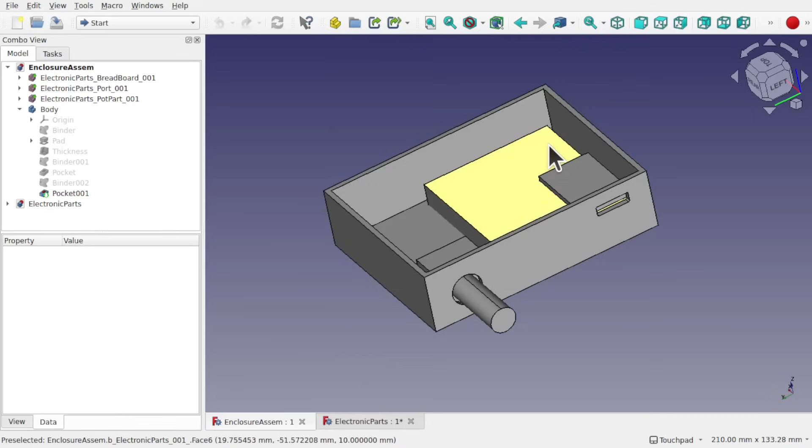Hi everyone and welcome to the channel. Today we're going to be looking at an assembly first approach for creating a box with components within, such as this. When we say assembly first approach, we're looking at creating the electronic components first, as a footprint for any cutouts or hollows in the box to take these components. Once these are created, we can build the box after they've been assembled.

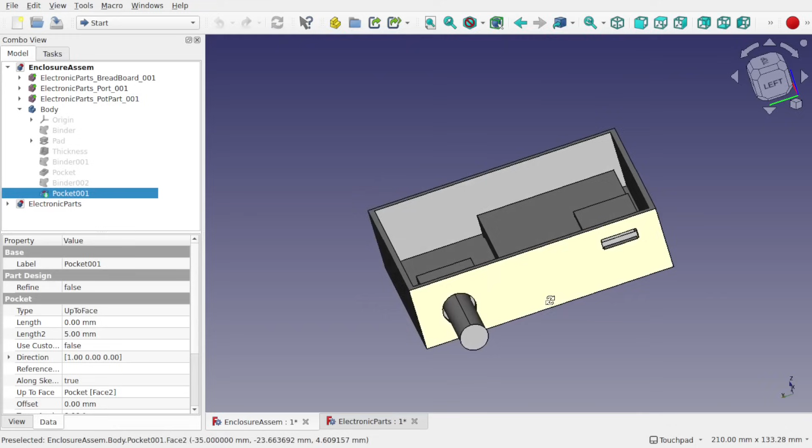So here I have the electronic components assembled in the right configuration, and then a box is created around those. This is just a simple box to get the idea across, and you notice we've got these cutouts here. The good thing about this workflow is I can move the parts under constraint, such as this potentiometer, and hit OK, and the box automatically reconfigures and adjusts around those components.

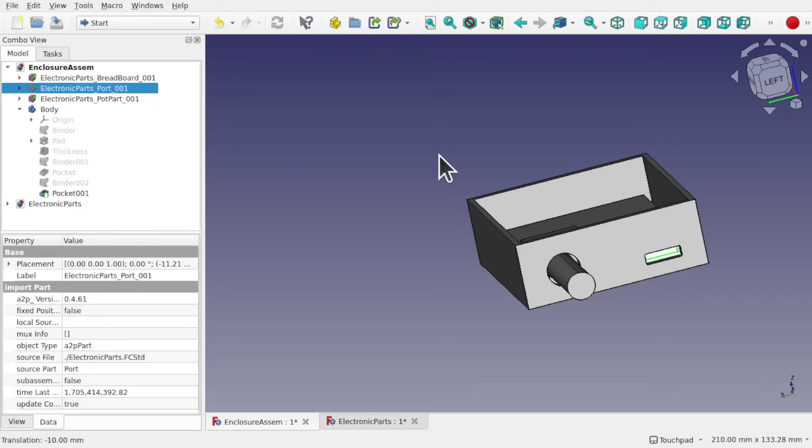So for instance, let's take the port, right click and transform, bring this down and hit OK, and you can see how that readjusts.

We've also included configuration tables. So for this part here, this potentiometer, I've actually built it so these can be adjusted. If I click on potentiometer, I have a drop down here that I can adjust the size of, and the same with the breadboard. This will also have an effect on the assembly when we hit refresh parts in the A2 Plus workbench.

So I hope you're enjoying these videos, and let's have a look how we would follow an assembly first approach.

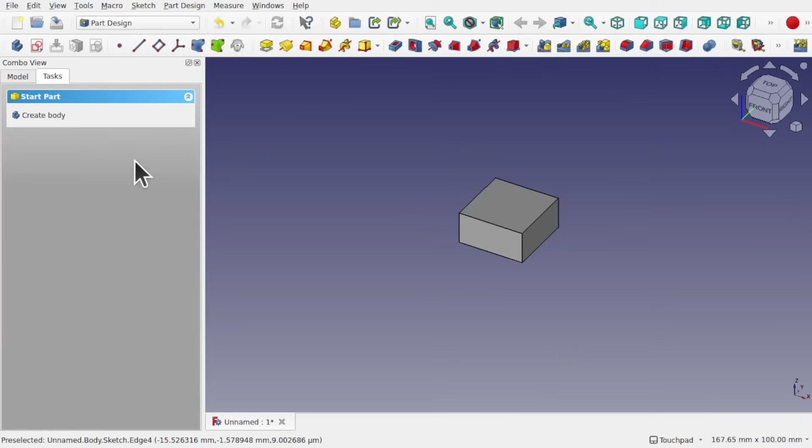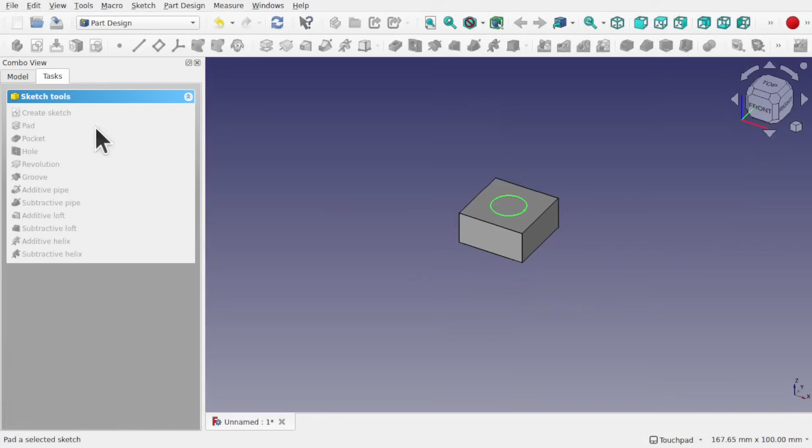These will all be in the spreadsheet in the end. And then we can add something on top of here. Sketch with a circle, something like this, and it's just for the footprint. So I'm going to place another diameter on here of 10 millimeters. Close that, and we'll pad that to 30 mil. So we've got something very simple like this.

So that's one body, and we'll just call that pot part for the potentiometer. And I'm going to come over to the spreadsheet.

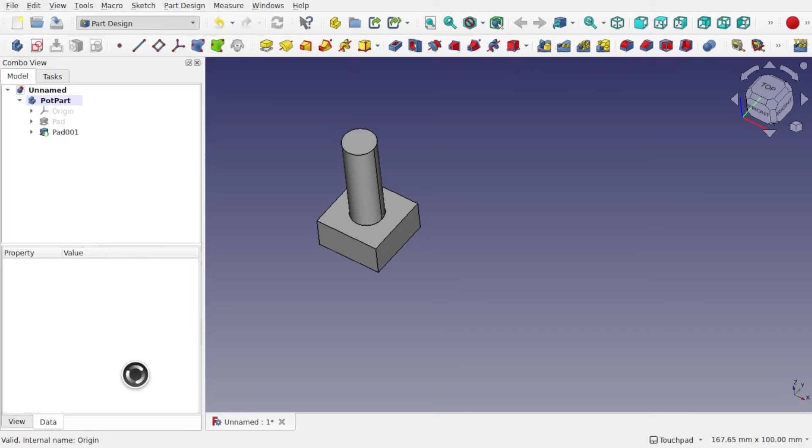So come into the spreadsheet workbench, and we'll set up a spreadsheet for different sizes. So let's come in and create a spreadsheet in here, and we'll add some sizes in here. Across the top, I'm going to put in what it's for, so this is for the potentiometer, just call it pot. And we'll place it in here: type, base size, and the knob diameter. And these have to be strings. So this is going to be a lookup where we can change the size of that potentiometer.

So we leave this one blank, and there's a reason for leaving this blank. There are tutorials about configuration tables on my channel, you'll be able to pick up the process from those.

So I'm going to quickly go through this, and these have to be strings. So we're going to put in here a P1 and a P2 just for now. We can add more in here if we wanted to. Base size, 20mm for this one, and this one's going to be a bit bigger, so let's put 30 for this one. The knob diameter, this one can be 10 and this one can be 15. So what were the diameters on this one? So that was 10, yes. So we're there.

So that allows us to create some proper diameters with the actual part itself. So that's changed that sketch. We've got a sketch in here, and this is the knob diameter. So we come in here and we're going to change this one.

Now the thing is, with my spreadsheet I've got here, let's close that. I want to be able to select each of these, so I'm going to make something called a configuration table.

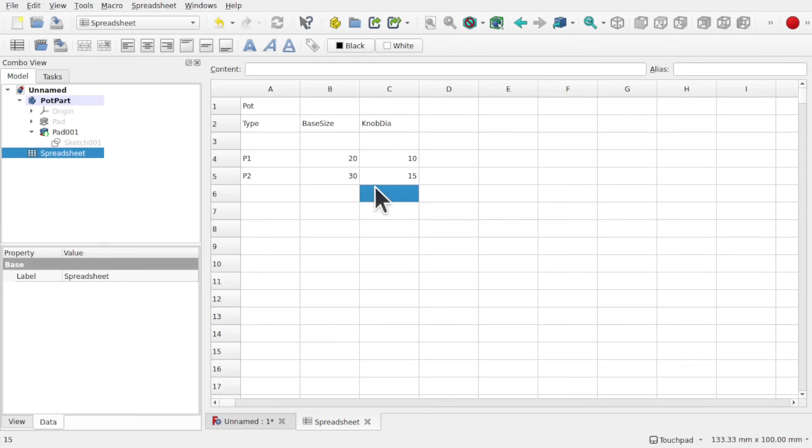What I do is come up and highlight these from this blank row here. If I right click and configure table, I've encapsulated all the data included in the blank row at the top. It allows me to set up the configuration table with a cell range, starting from the blank row, to the last cell of data, which is C5. Let's go for C5, and then I'm going to attach the configuration table to the body.

So we type in body, which is this one here, the pot part. I can even come in here and use the pot part, which allows me to attach it to that one. That makes it more descriptive.

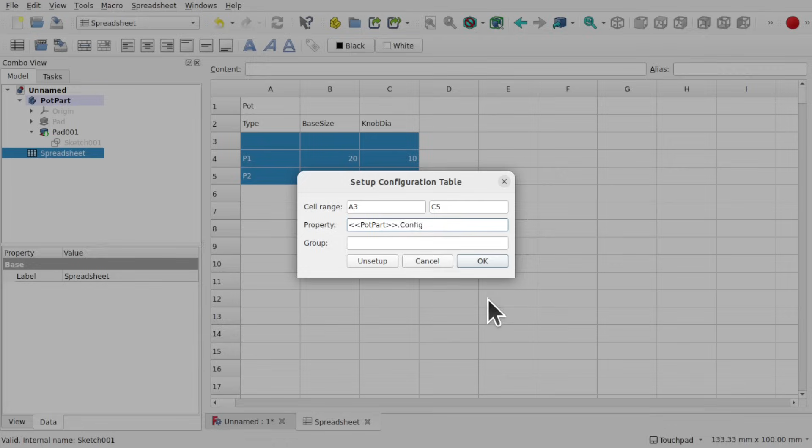And we need to add some kind of identifier in here, so I'm going to go for config. This can be whatever you want. I'm going to call it config, or let's call it pot types.

And OK that. So what we've got now, if I come over to this pot part here, we look down, we've got pot types, and we can change this to whatever one we want. Now, notice the spreadsheet has got this row in here, and it's copied the value of the first one into that. If we look at the pot part, we've got the pot types, and if I change this to pot type 2, look at the spreadsheet, this has changed.

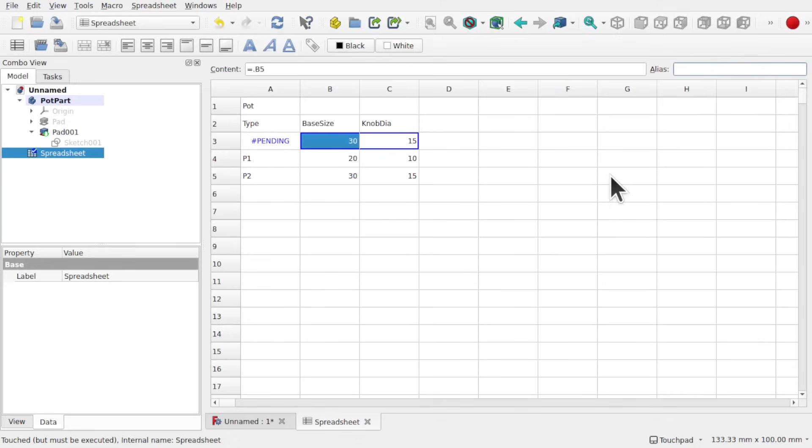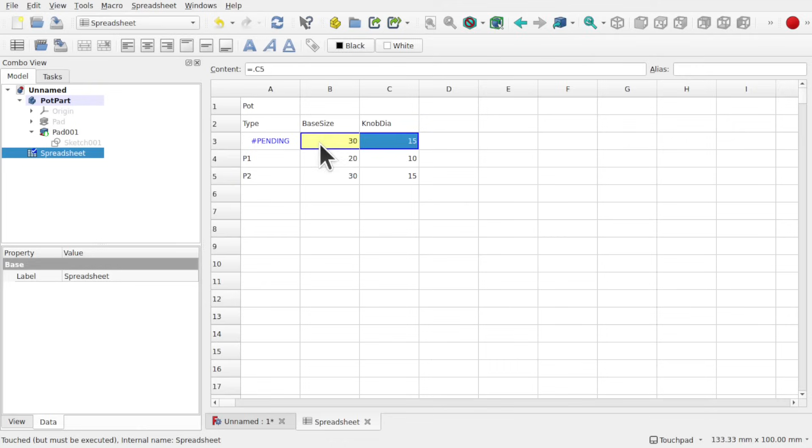So now I can alias up this row, and we've got base size. I'm just going to use the same column names here. So we've got base size, and this one, you can see it's highlighted in yellow. That's going to be the knob diameter, KnobDia. So we've got those there.

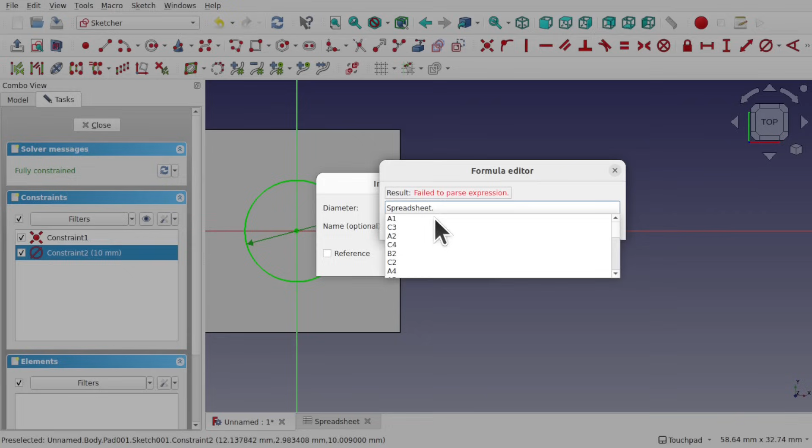Now let's go back to the sketch. Let's close that. So I'm in that pad in this sketch, and we'll alias up this diameter here. We'll come into this, the formulas, and what we'll do is hit delete and type in spreadsheet. And we want the alias, which was knob diameter. There we go, and OK that. You can see we've got 15 grayed out in there. Hit OK. This has changed to orange, which means it's referenced outside of the sketch, and we can close that.

So we've got that one in there. Let's do this one now, which is the pad. It's actually at the top. We want the base, this sketch here. Let's double click that and set up the base.

Double click, and we want this one, spreadsheet, and type in base size. So we've got spreadsheet.base size, and OK that. OK that again, and close.

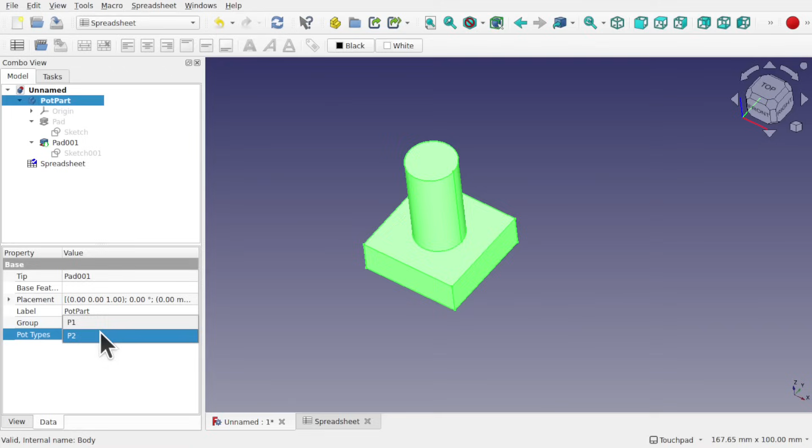So now we've got all those sketches linked to that spreadsheet, which is controlled by the pot part, the body. So this drop down here, when I change this now, our configuration table kicks in, and we can change the sizes of this.

Let's make another component. So back to the part design, we're going to create a new body, and we're going to create a new sketch along the XY plane. Let's come over to the model and just hide the original pot part, this one here, press the space bar, and we'll create a breadboard.

Remember, this is just a footprint, so I'm going to create a rectangle and use these two edges and this center point. Symmetrical constraint, you can use a center to a rectangle if you want, this one here, and set the sizes.

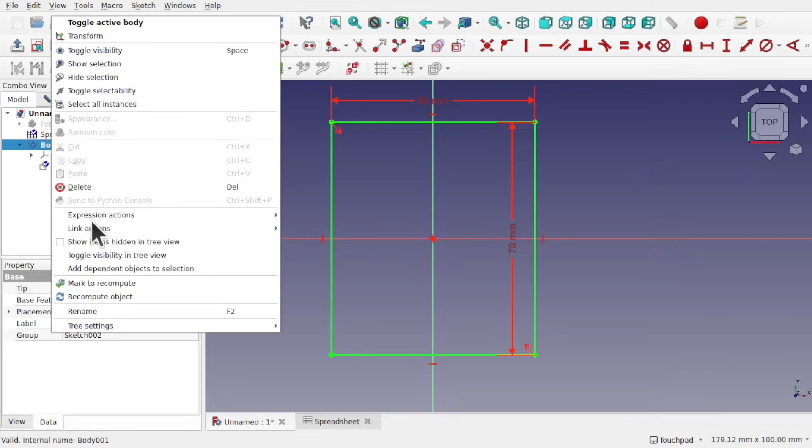And again, we're going to control this, get some sizes in for the time being, control this via spreadsheet. 60 by 70 for the breadboard. Just rename the body, right click, rename, and type in breadboard.

Let's go to the spreadsheet and create another configuration table in here. So this one's going to be, say at this point, if I'm going to add more in here, it might be best to come over to here and type in breadboard and place them in here. So you can have more than one configuration table in a spreadsheet.

Again, type, and let's place height, width, and length. Again, leave this row clear and type in here, I'm going to go for a B1 and a B2. You can call these what you want. So the height here will be the actual thickness of the breadboard. Maybe I should type thickness.

So this one will be, let's go for something like 10 with a width of 60 and a length of 50. And we'll just make a smaller one in here of 30 and 25. Do we have the same thickness? Let's go for slightly smaller, so something like 8 mil on the thickness.

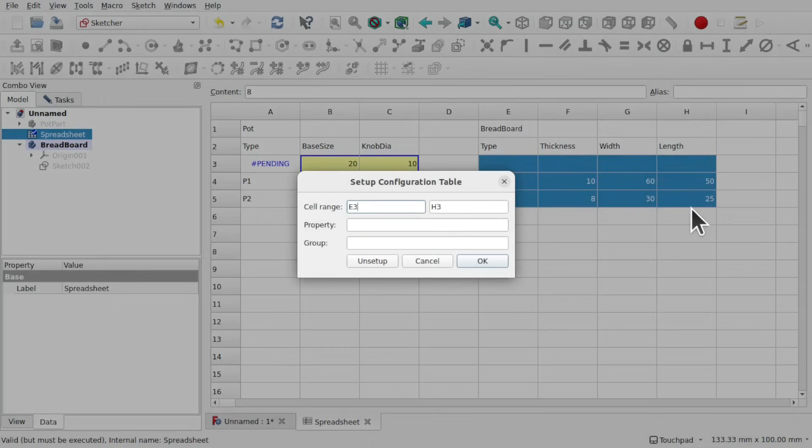So we've got this one set up. Again, highlight these rows, right click, and configuration table. So we've got E3 to H5. Let's place H5 in there. And the property, I'm going to place it on the body. Use the name, so we need the breadboard there, so we get the right body.

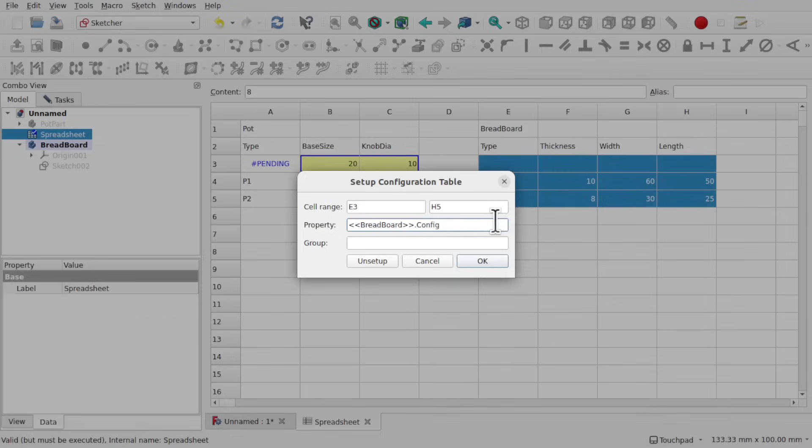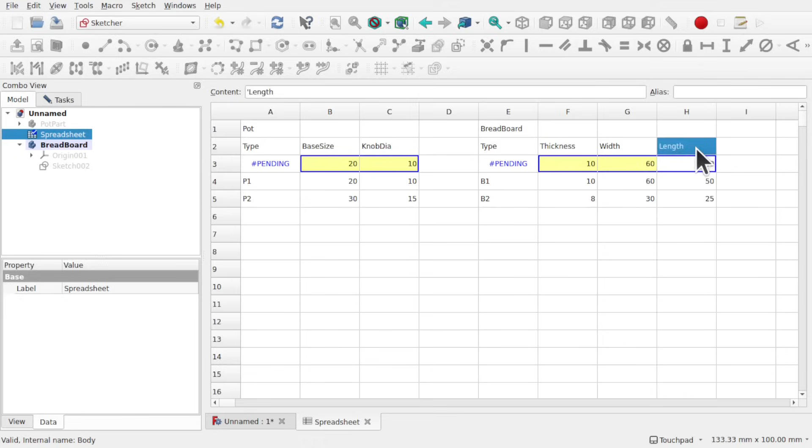And we'll change this one to config as well. You can call this whatever you want. And then hit OK. So we've got the config on the breadboard, and this is the config on the pot part. Let's set this up. This one is going to be BB thickness. And this one's going to be BB width. And this one's going to be BB length. So we've got our sketch in here.

And we'll set this length spreadsheet dot BB, and we'll put this as the width. Okay, that, and okay. And this one, double click that and set that as BB. Well, it's actually going to be spreadsheet dot BB length, and okay. So we've got those two in there.

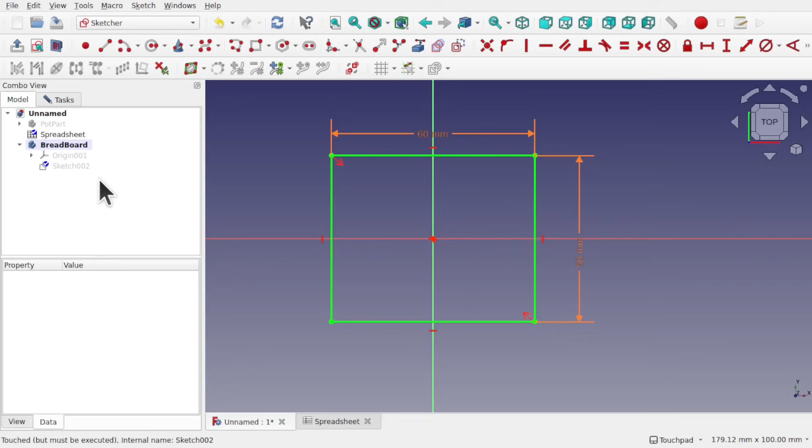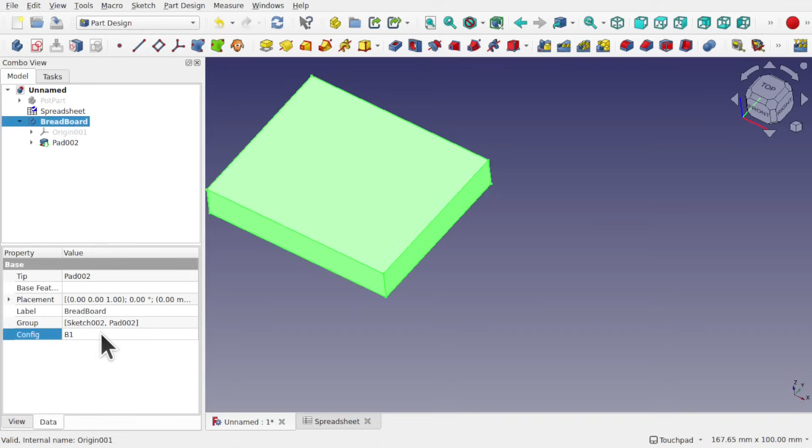This creates our breadboard, just the footprint of the breadboard. Let's go over the tasks and hit close. We'll take that sketch, we'll pad this, and we'll set the parameter in here to spreadsheet dot BB thickness, and okay that. So now what we've got on the breadboard, we should have a config which we can change, which will change the size of the breadboard. So now we've got our part set up.

So we've got a breadboard and a potentiometer. Let's save this and call it electronic parts. And we'll quickly do one more. And we'll create a body, create a sketch, XY plane, okay. And this is going to be a part that doesn't change size.

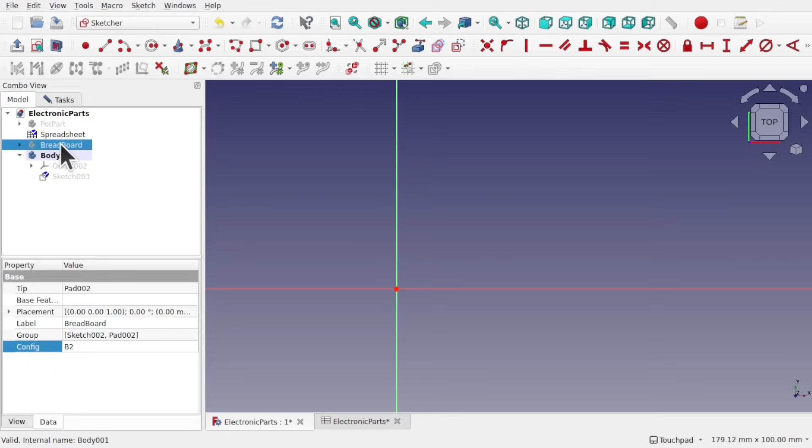So we've got our body here. Let's get hold of the breadboard, press the space bar to hide it. And something very simple like a port or something like that. We'll do that. We'll put some length in here of 30. This height of 20. We've got that there. Close that. Take that sketch.

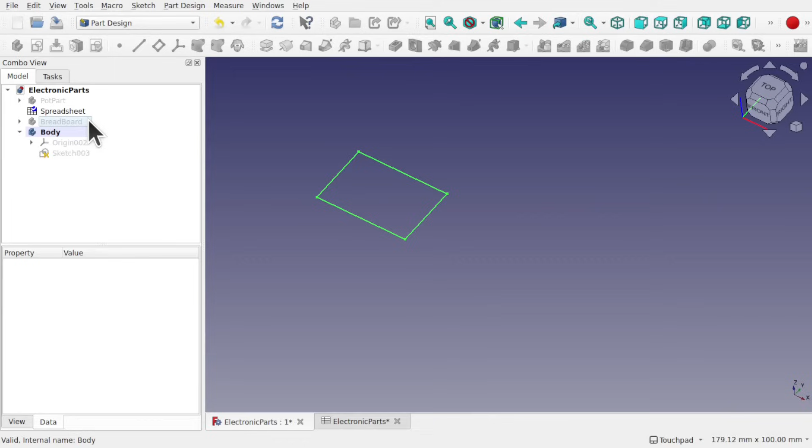And it's going to be some kind of board. So I'm going to pad it by 2 millimeters. And then on top, we'll add a sketch. So I've selected that face. Add a sketch.

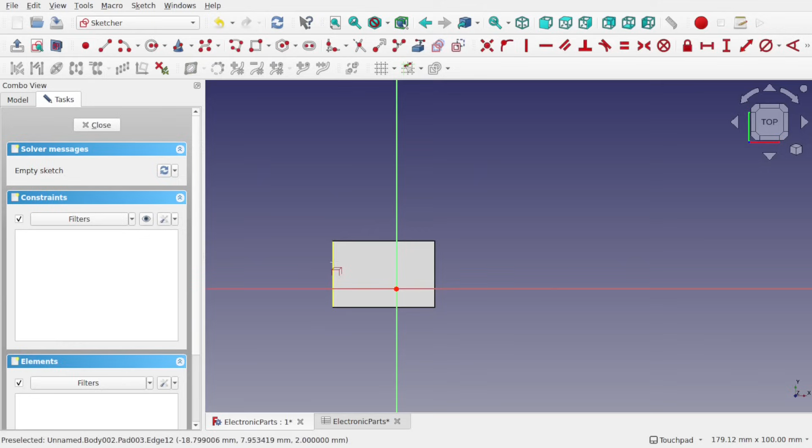And we'll place something in here. So let's bring in this line, which we're going to attach it to. Let's zoom in a bit so we can see what we're doing. And I'm going to place just something quickly on here, like so. And this will have a height of 12 millimeters.

And we'll place it some distance away from here. So I'm just doing this one very quickly of 4 mil. And we can set some length in here as well of 4 mil as well. So we've got something very simple. I'm just going to pad that. So select that sketch and pad that by 3 millimeters. And what we've got is basically something like a port.

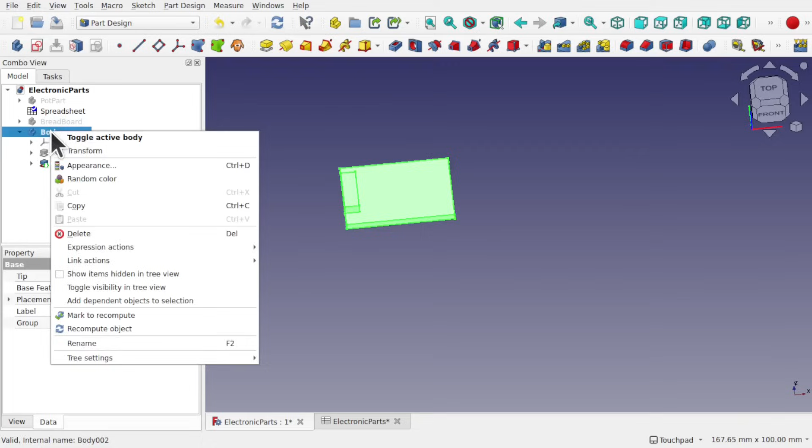So this is going to be a port that we can push a connector into. I'm going to right click and rename that to port. So it's a port on a board.

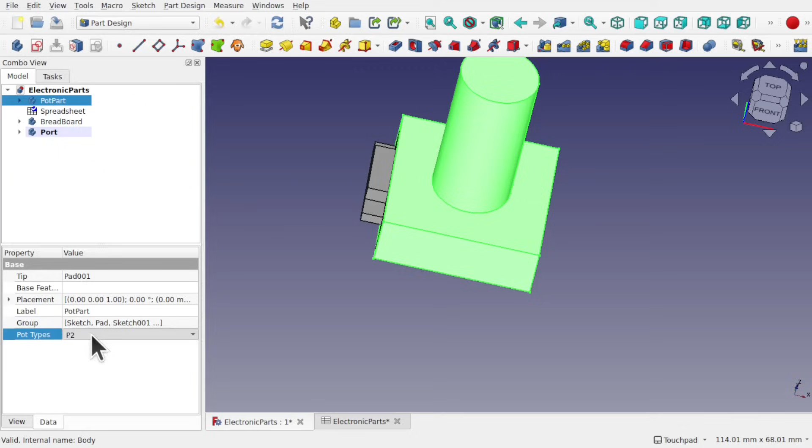So we've got our footprints of our electronic components, and now we can go about assembling them. So we have all our parts in one file, our electronic parts. We've got the port, the breadboard, and the potentiometer, and we can change them via the drop downs that we've added onto the bodies, or set our port. We're going to create an assembly for these now to place them into a position and then create a box around them. So we're using an assembly first approach.

And to do that, we're going to be using the A2 Plus workbench, this one here. If you haven't got the A2 Plus workbench, just come up to Tools and Add-on Manager, and you'll find it within here. We can check for updates and see if that actually needs updating. I've checked for updates and I've got an update available, so I can click on that and click the update button, which is close, and I'm going to restart now.

So I'm back in FreeCAD and I can come over to the A2 Plus workbench, and I'm going to create an assembly in here. For that, I'm going to create a new file and then straight away save it. So File, Save, and I could call it Enclosure Assembly.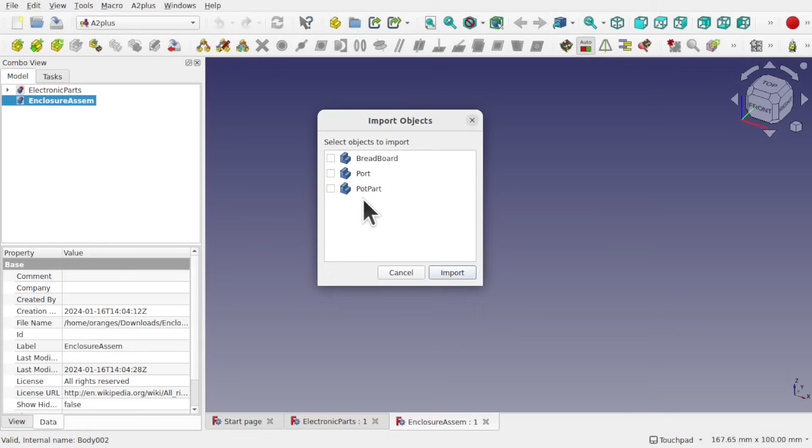We've already got the electronic parts open here, but what I'm going to do is import those parts into the assembly first. So I'm going to use this button here, Add Shapes from External File, and click that. We'll find our electronic parts, and we have each of the shapes here - the breadboard, the port, and the potentiometer. The first one we import is going to be the fixed part, but we can change that. So I'm just going to check all of them and hit import.

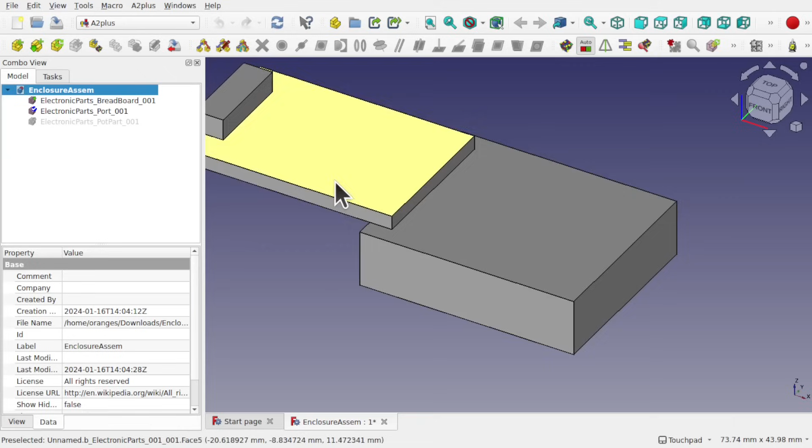So they've come in. The first one that's been laid down is the fixed part. And if I move my mouse, all I need to do is click and we get the next one. And those are all in our assembly. So I've got all the components in our assembly.

I'm just going to come up to View and toggle Axis Cross so I get an idea of where my axis is to make this a lot easier. So with assemblies in the A2plus, because it has a solver, it needs a fixed part because the solver will solve the assembly through a chain to the last part, which is fixed. So we always need a fixed part.

Now, because this one was imported first, we look down, we see this fixed position as true. We can change that. We don't need to have this as a fixed position. We could have the port or the potentiometer as a fixed position, but I'm going to go for the breadboard because it's logically the one that will be the fixed position.

And I can move this with a right click and transform. Fixed position parts are moved with the basic right click and transform. The idea here is to get a layout of how the components are going to sit in an imaginary box.

So for instance, I want this component here. I've got this port here. Because this is a fixed position now, I can start constraining to this. So if I think of my box is going to come around here and encapsulate all these items, then I would say that this face here would probably be in line with this breadboard.

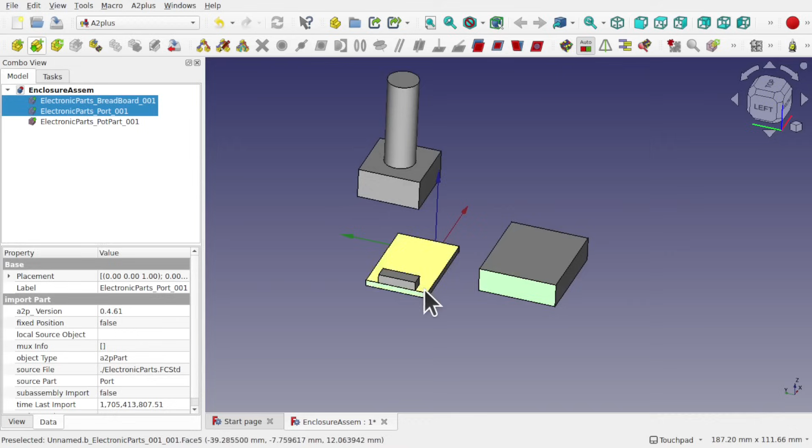So these two faces will be on the same plane if they're pointing in this direction. We make those planes coincident. If we have a plane here and a plane here, these will pull them into a planes coincident. Remember that the plane is not just the face, it's the plane that this face sits on. So if we place an infinite rectangle here, it will be in line with this face.

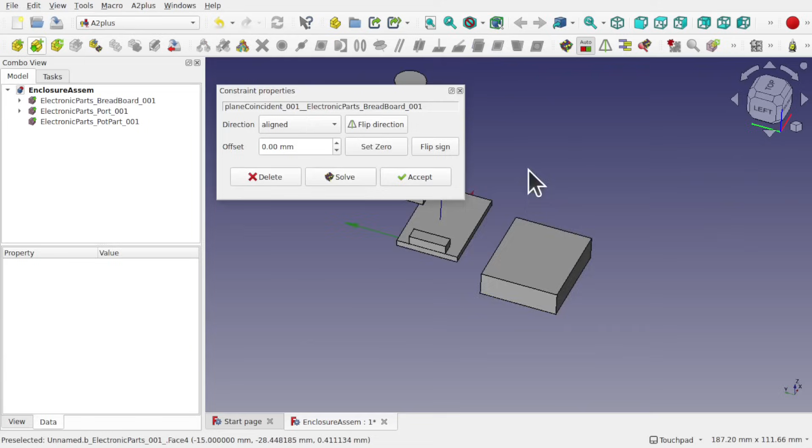So control click both those faces, they're highlighted, come up and use the plane coincident. And what you'll see is they'll be pulled coincident to each other. Remember the infinite plane that they sit on, and you'll see they are actually in line on that same plane, and we'll just accept the constraint.

So now I can actually move this with this tool here. There's a tool, move the selected part under constraint. So we click that and then click the selected part, this part here that we want to select. If we move it, I can't move it forwards, move it left and right, but I can't move it backwards either. And also I can move it up and down.

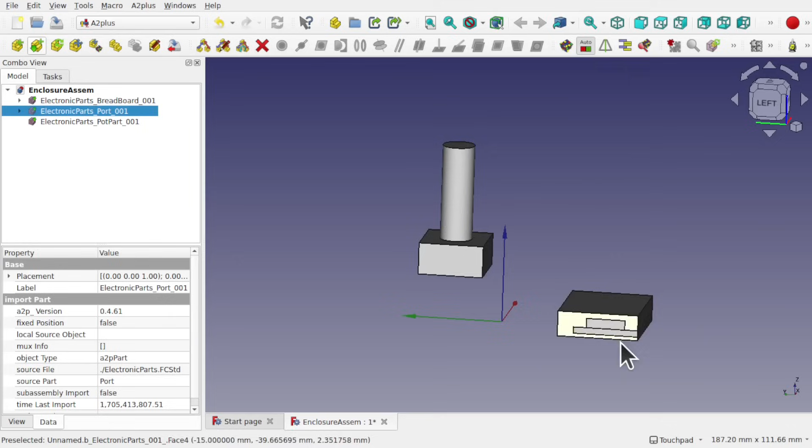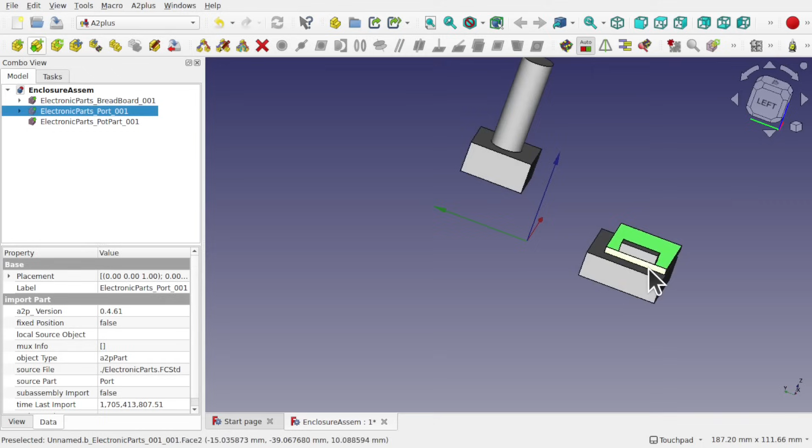But we stop and keep that plane, that face sits on, coincident with the plane of the breadboard, that face there. So I'm going to place this. Now I'm thinking that if we have this port with some legs on here, then maybe we want to place it on the breadboard, so we want to place it here. So straight away we might see that, well, actually we might need a bigger breadboard, and we can adjust that.

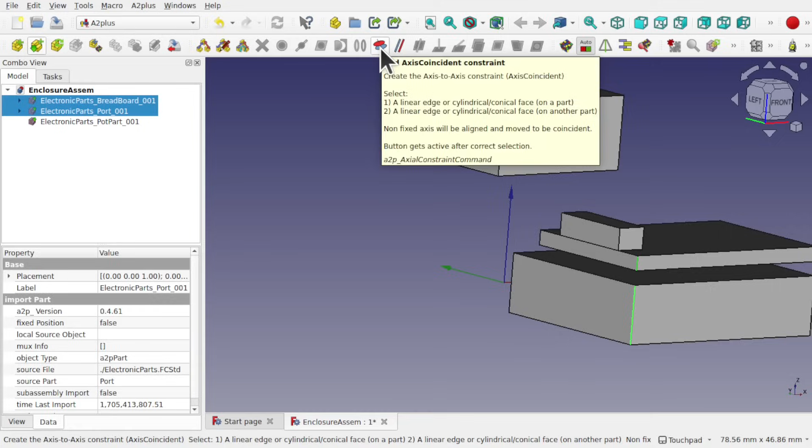So that's there. I'm going to perhaps take this edge and control click this edge and use an axis coincident constraint. So those edges, if I click that, that'll bring those edges together - the axis of those edges - and they'll be coincident, and we'll set that.

So now if I try to move this, what will happen is that we move it under constraint. So I can't move it backwards, I can't move it left, I can't move it right.

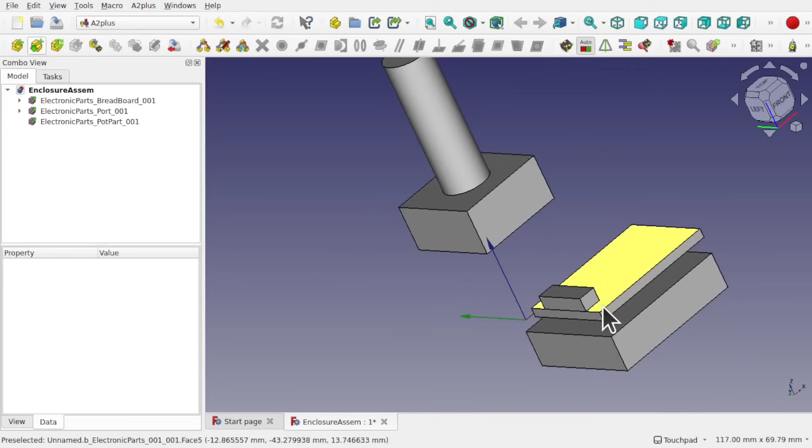The only way I can move it now is up and down, because it keeps the axis of this edge together along with the faces, so they're both coincident to each other. One thing to note is we don't need both of these constraints. The first constraint added allows us to move along that plane, but by adding the axis constraint on the edge, it actually makes the plane's coincident constraint obsolete.

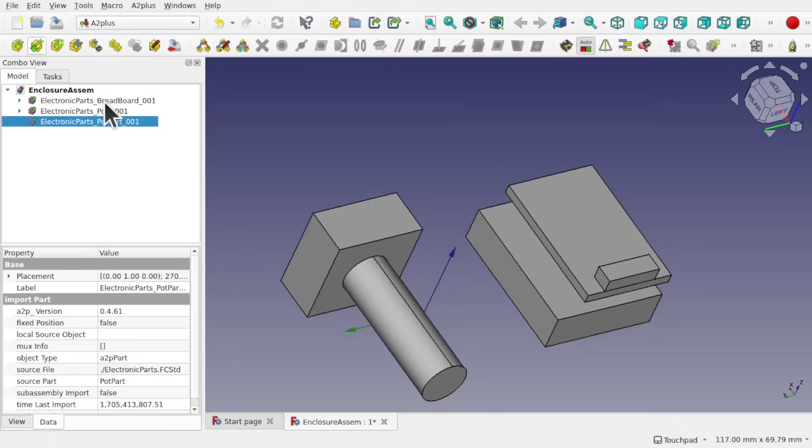Once I'm happy with where this is going to sit, I can move on to this one. It may be handy to come into the part, right click, and use transform to get it into the right position. For instance, let's bring it around this way, and then hit OK, so it's in a position where we can easily make our additional constraints against it.

Again, I'm going to use this plane of this face and this plane of this face and make them coincident to each other, and accept that. Maybe I want this bottom edge as well, so take that and this edge here, and make those axis coincident, and accept that. So these are on the same line here.

Then it's a case of using move selected part under constraint, selecting that part and moving it across to wherever we want. So I want to move it, say, about here. So this could be my layout totally finished.

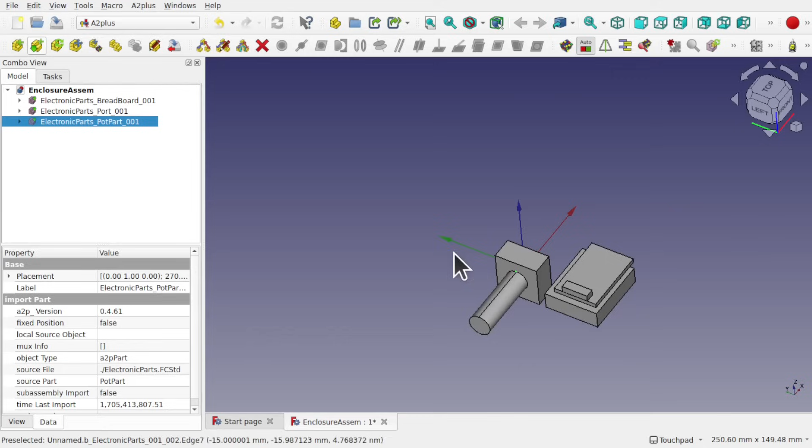And this is where I'm going to create the enclosure around. Let's save that — File, Save, or Control S. Now at any time these can change size.

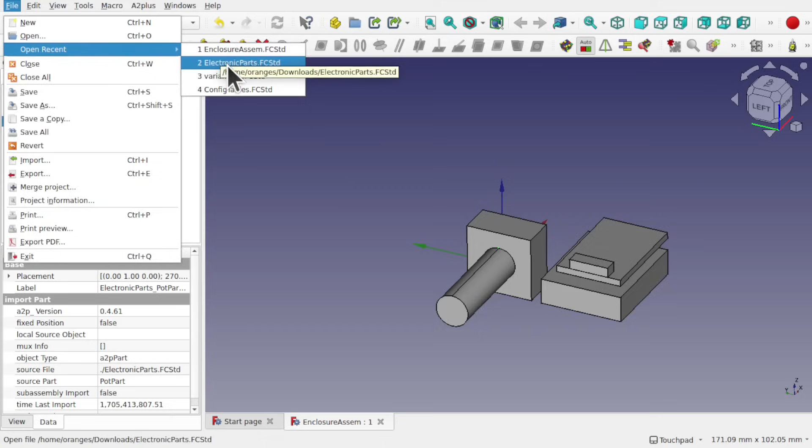Remember we had, if I go back to the electronic parts, these can be changed — the sizing of them. So that's changed this breadboard. If we look at the breadboard, we're on breadboard 2 at the moment, so let's drop this down and use breadboard 1, which is a much larger breadboard.

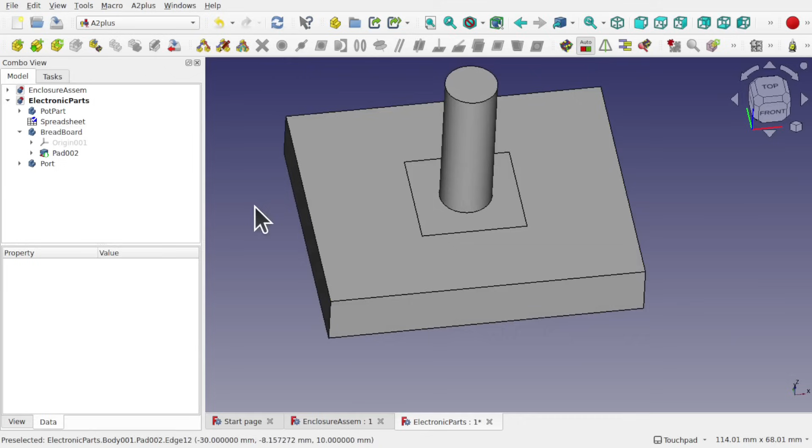We have to save this, so Control S to save, and let's go back to our assembly and refresh, update parts imported into the assembly. Hit that, and the breadboard updates — you can see the breadboard is updated in size, and we just need to make some finer amendments, finer adjustments with, say, this potentiometer.

Now we've got everything in place, we can start building the enclosure. It's important to build the enclosure within the assembly itself, so we get an idea of where all these parts sit, and we can create subshape binders against these parts, against the enclosure, to take out things like cutouts or hollows for our parts to sit in.

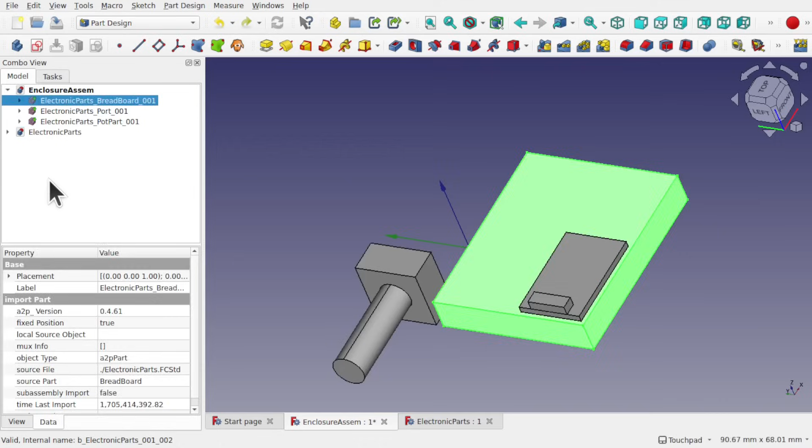I'm going to be using the part design workbench for this. Remember, we're using the same assembly file, so that's come over to the part design. Now we must make sure nothing is selected in here, otherwise it's going to pull it in as a base feature, and it will take its original position. We don't want that — let's Control Z that.

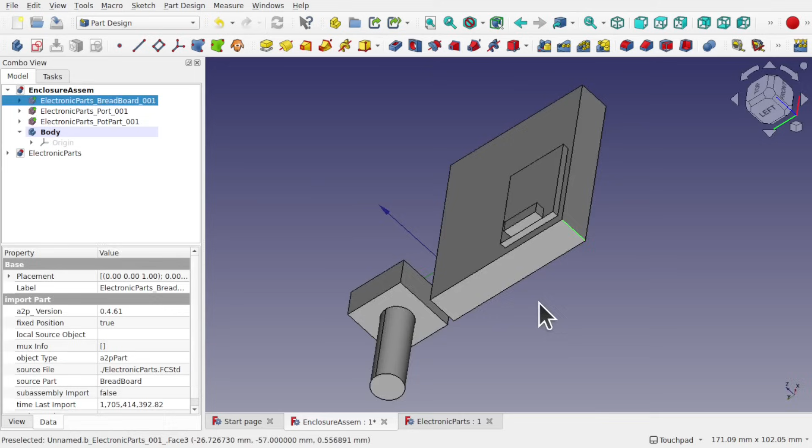So we make sure nothing's selected in the model view and create a body. The body has been added. Next I'm going to Control-select a number of edges from the imported components, which will define the boundaries of our box that we can use a subshape binder against and make sketches against.

And we'll take these two as well, Control-select these. So I've got those in there, and we'll click on the subshape binder — this will pull those edges in. So now if I hide all of these parts here, what you'll see is four orange lines.

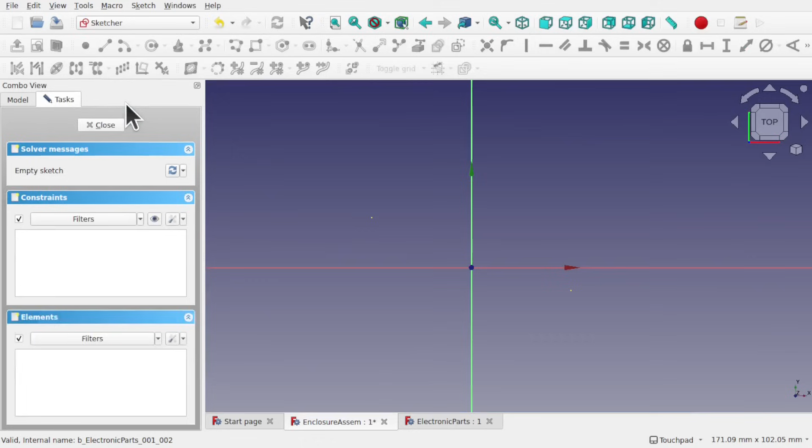So now I can come into the body — got the body there — and create a sketch along the XY plane, and hit OK. We can see those four lines there, so you can see them in the sketch. I'm going to use the external geometry tool and import these lines into my sketch.

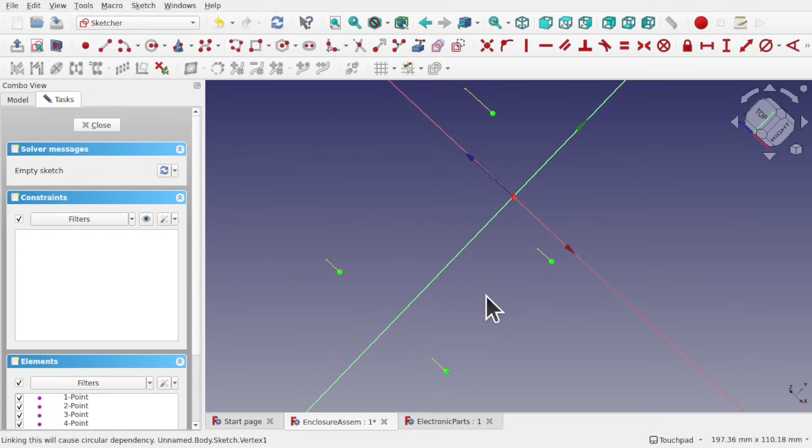Remember, the sketch is 2D, so we're going to get the vertices going along here. Let's click on top and have a look, see what we've got — so we've got the vertices that have been pulled in as a reference to that box. So now we can create the box.

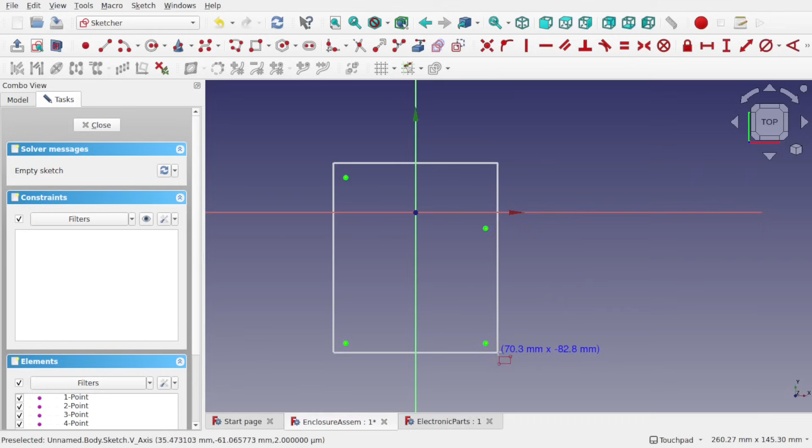Now I'm going for a standard box across here, and I'm going to come out this way because I want some clearance for this box. So something like that — let's hit escape. So this point and this point.

And we're going to use the lock constraint, so I'm going to quickly lock those into position. This one will be a minus value, but that's fine. We're going to give around 5 millimeters of clearance.

And the same with this one, 5 millimeters. We can use the horizontal and vertical constraints if you want, it's up to you, but lock is quite useful to actually get this geometry down quite quickly. And a lock constraint on this side — again, it's going to be 5 millimeters.

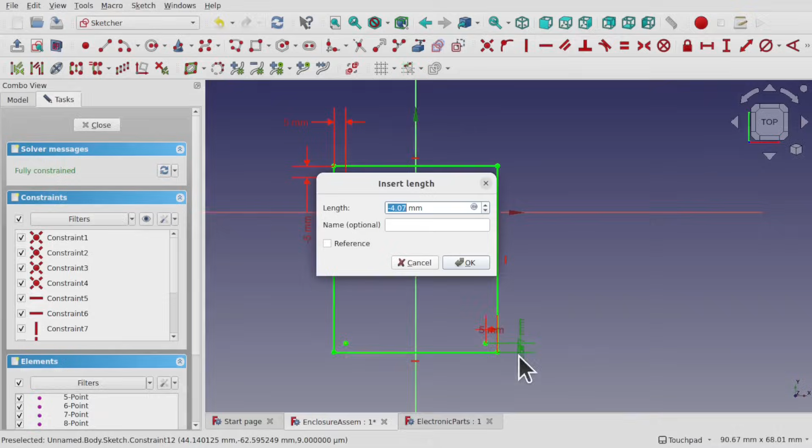Clearances, remember this one's -5. Clearances and sizes, etc. can be controlled via a spreadsheet if you want to, and we can place that in a usual single spreadsheet for all the items that we're going to place here. So we've added all those constraints, and let's close that now.

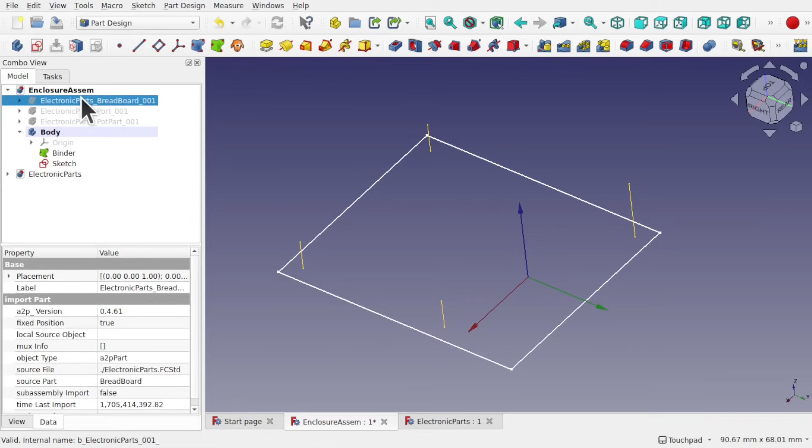So we've got the outline of the box that we want. Let's bring back the elements. I'm going to click on one and press the space bar, then click on the others and bring those back in. So we've got those in there.

If I wanted clearance with the sketch, I can take the sketch of that body, come down to the attachment—because it's attached, see, the attachment offset—the position, and change the position along the Z axis. We can give this a clearance of, say, 1 millimeter or so from there. So we've got that part in there now.

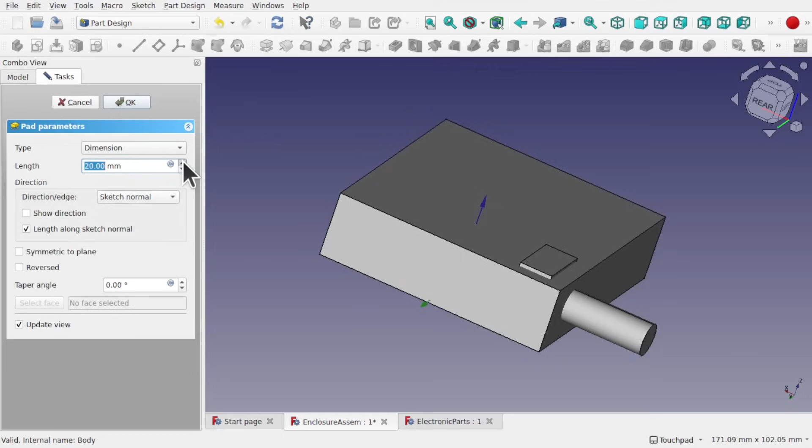Now comes the fun part. Let's take that sketch and just create a simple pad, and bring the pad all the way up so it encloses all the items within, like so.

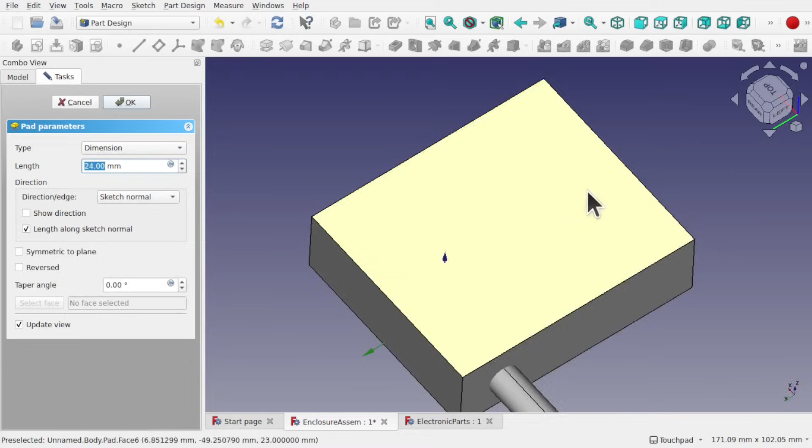It's totally up to you how you make that enclosure. We may want a half enclosure, for instance, something like this, so it's halfway. But I'm going to go for a full enclosure and then remove the walls in here so I can see inside. That's okay.

I'm going to take the enclosure and now use a thickness to remove those walls. And I quite like this beveling on the outside, so I'm going to keep that.

We don't have to. We can come over to the left and select different join types like intersection, but I'm going to go for arc, and we'll increase that slightly to something like that.

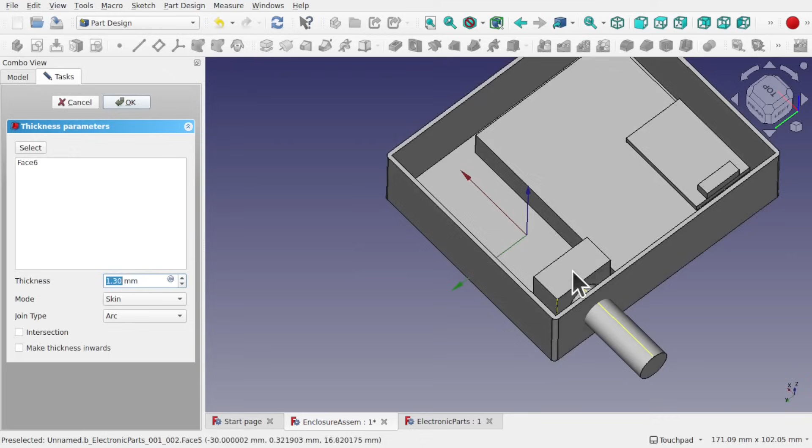Remember, we can make this go inwards by using the make thickness inwards if we wanted to, and go this way. It's totally up to you. Let's actually do the inwards thickness. So we've got that there.

So we've got a 1.3mm. Let's change this to 2, and we'll OK that. We'll say we're just creating this box here.

We can actually put a top on here if we wanted to, but we're interested in creating the cutouts of this now. So for the cutouts, we use subshape binders.

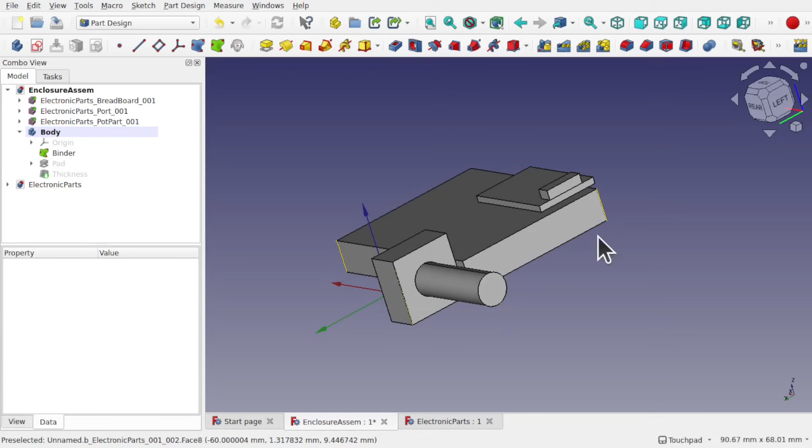So let's click on the box and hide it and think about the subshape binders. We have the face here and a face here that we need to use as subshape binders. So we click on this one here, and what will happen if I create a subshape binder for that one—we've now created the area that we need to cut out for this component here.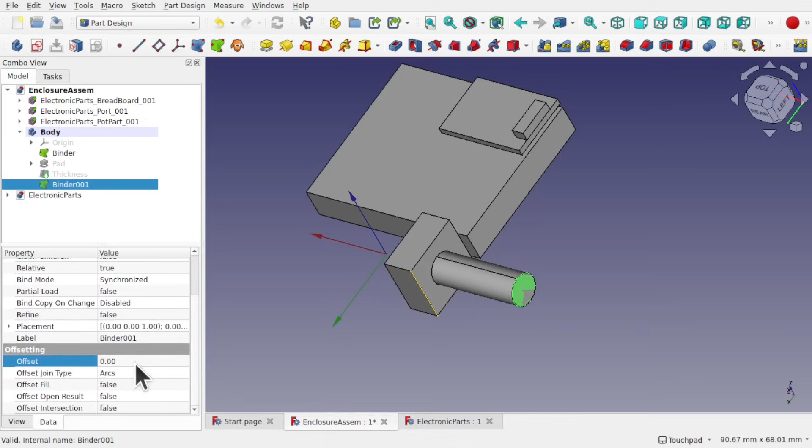But we need some clearance, because if we cut this out, this is going to be tight on this component and it won't turn. If we look to the left, we have this binder, and if we come down to the offset down here, we can use an offset to increase this offset by, say, 2, and click off. You see we have the offset there that we can cut out from the shape.

Let's click on the binder and just reduce that down a bit. We've got 2 here; let's reduce this down to 1. So we've got some clearance now. We can go 0.5, etc.

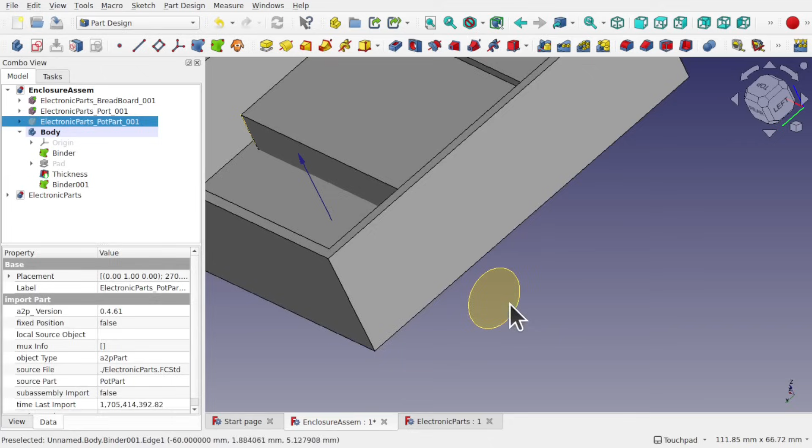Now what I want to do is pocket this through the thickness. So our last operation, this one here. To do that, let's just hide the component by clicking on it and pressing the spacebar, and select the binder. We use the pocket.

And what we'll see is that because we've got the length, it's pocketing, but it's not going far enough. If we chose through all, it will go through the wall and outside the other, which is not what we want. And if we go up to face, what we can do is pick the face this will travel up to.

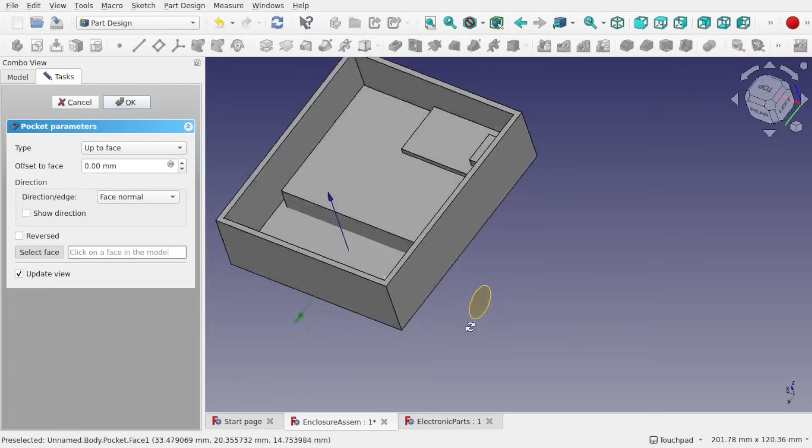So I'm going to come round inside and select the inside face, and we've pocketed through one face and up to the back face—so right through that material there. Let's hit OK.

Let's turn our attention to the next component. I'm going to click on the box and press the space bar to hide it. Come in, select the face I want to pocket, this one here, and use the subshape binder.

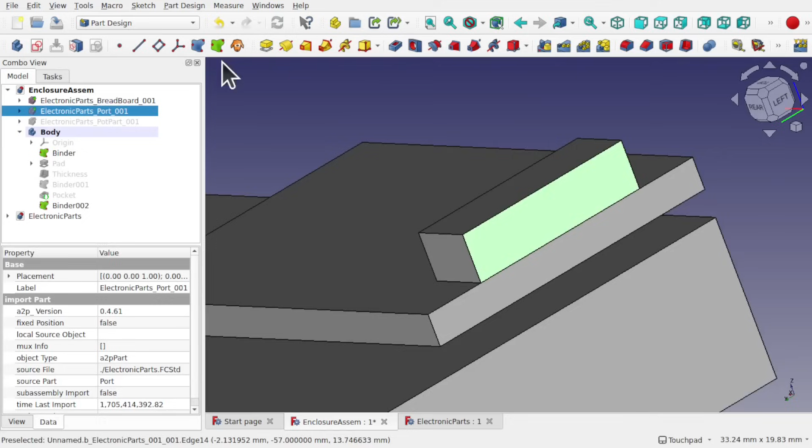Because we've got an active body, it'll pull that face within. Again, we can click on the binder, come down to the offset, and give it an offset, say of 1mm. Let's have a look what that's going to look like. Might be a bit too much. Let's go for 0.5.

We've got arcs set for the offset type. We can use that as intersection or tangent if we wanted to. Let's go for arcs to make it look nicer.

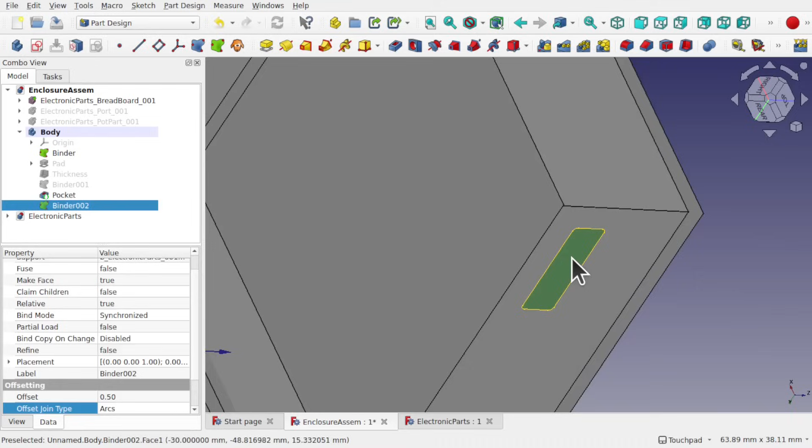Now we've got that subshape binder. Let's hide this component and bring back the pocket. So our last action, the tip, press the spacebar. Click on the subshape binder and use a pocket. Now you see that it looks like this has disappeared, but what's happened is that the model has shifted to the left. We need to use this item here, the fit all, to bring it back into view.

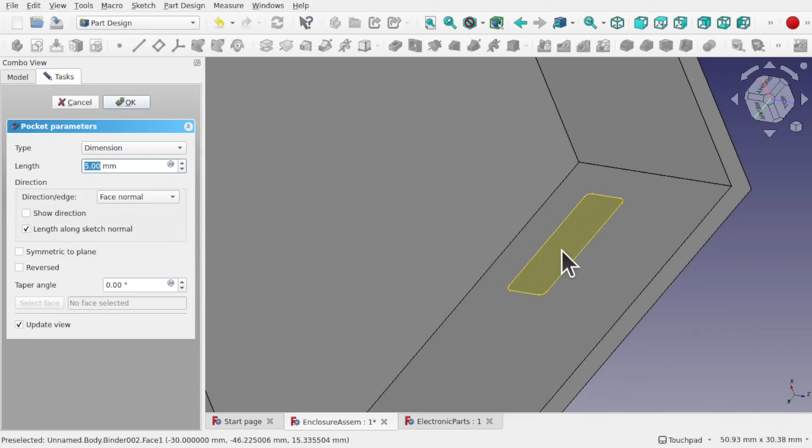Let's zoom in. We've already got the subshape binder selected and the operation is being applied, but we need to click reversed, so it goes in the reverse direction. From here, we can select up to face. Let's see if this is going to work, and click on this face, and it will go through and out the other side. Or we could just use the dimension as you saw before, and that would actually work with that one there. If I click OK, what we have now is the box with the cutouts.

So I'll bring back the parts. You can see that we've got the knob of the variable resistor, the potentiometer in there, and we've got a cutout for the port.

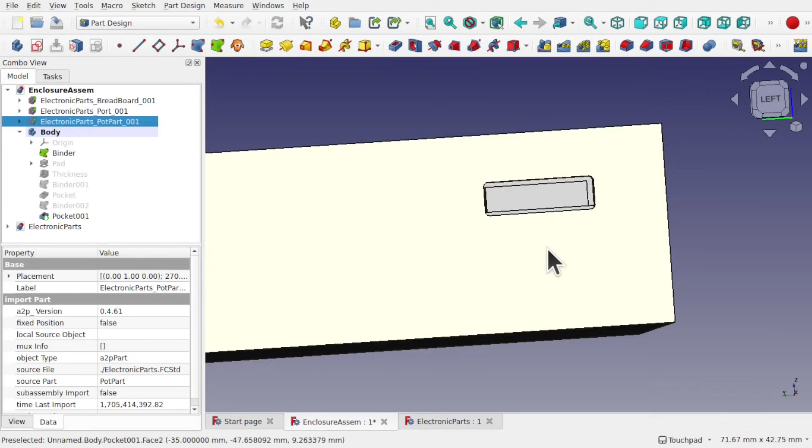These subshape binders are relative to the object that they've bound. You can see that on the binder. If we go down to the binder here, you can see that we have the relative setting, if I can find it, is set to true.

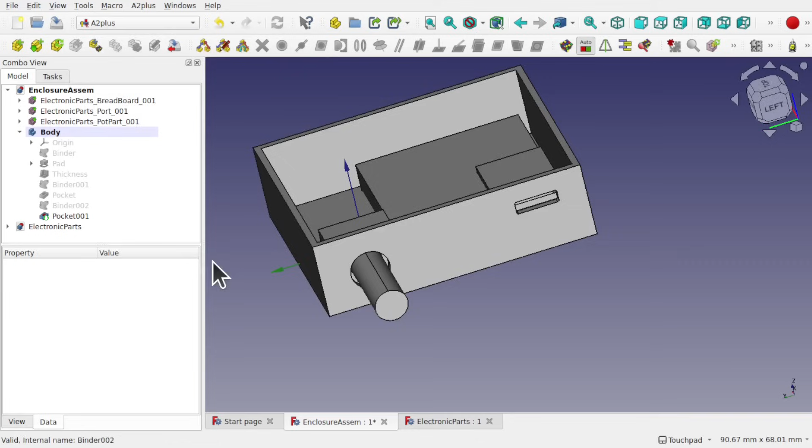Which means if we go back to our assembly, the A2 Plus assembly, and let's hide the binder and any binders that we see in there, we've still got the pocket there, and we use the move the selected part under constraint and select, say, this one here and move it over and drop it there. You can see it hasn't updated as of yet.

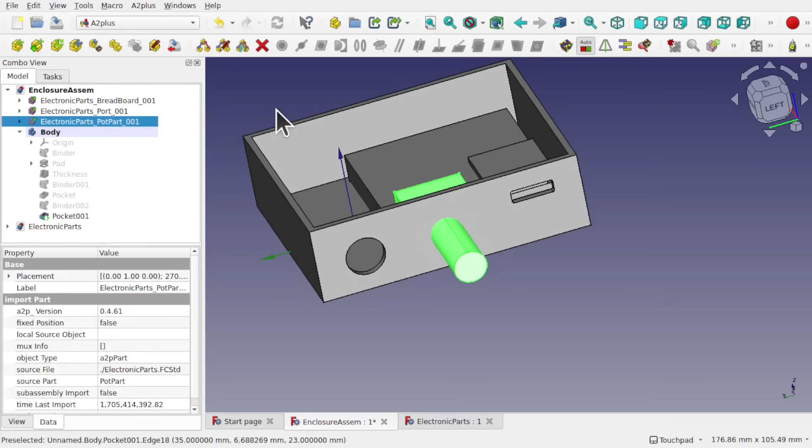So we need to force an update. If I go out to edit and refresh, you can see it's not available. So FreeCAD hasn't seen that it's been updated. We can force a simple update by right-clicking and using transform, just moving it slightly and hitting OK. That will force an update for the box to actually update, and everything is back in position.

The same with just right-click and transform. If I put this right out here and hit OK, it forces everything to update. So this means that I can place these parts into positions that I want. Let's bring this up a bit. And the subshape binder underneath will follow, as long as I force an update.

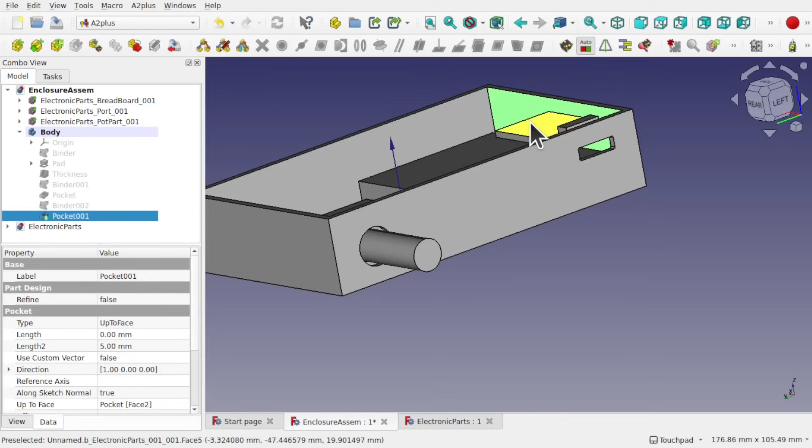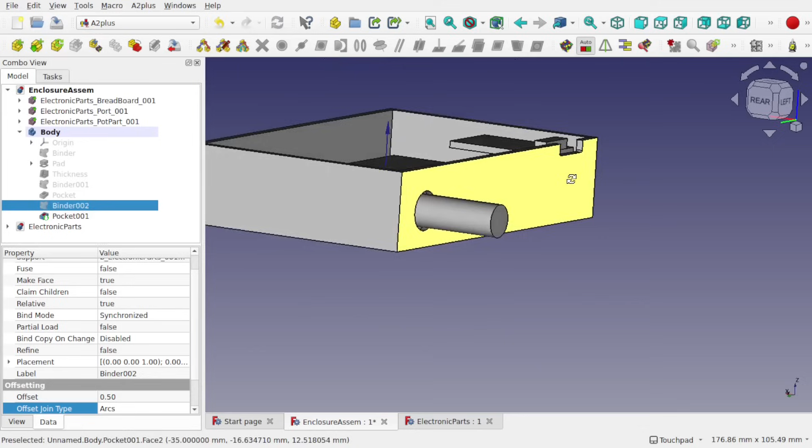Now, if I didn't use right-click transform, I could come into the binder. So this binder here is binder 2. Right-click on the binder and use synchronize. You see a tick has been placed upon the binder, and using the shortcut key for refresh, or just edit refresh, that will move it. You can see that's moved as we've moved the component.

We can move that under constraint and just use the transform, right click, transform, give it a small nudge and hit OK. And it's moved there.

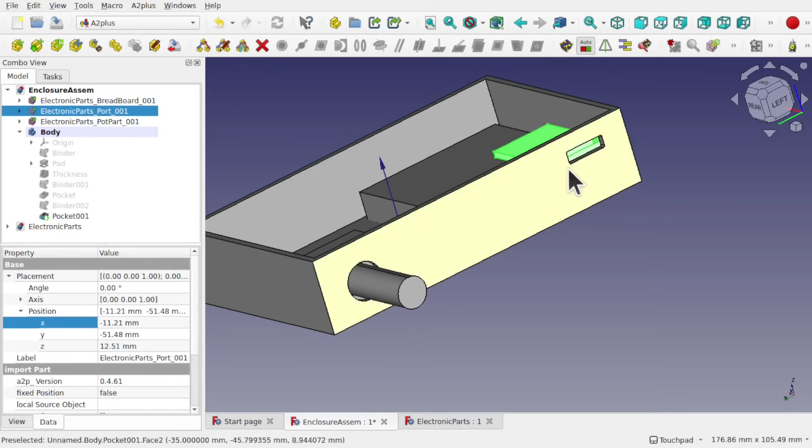Or we could transform this, move it under constraint, and then come over to the part, this one here, look at the placement and change the position slightly. And that will update. So we've got full control over our model just by moving these parts.

For our enclosure to update. So I hope you enjoyed that video, and I hope to see you in the new one.